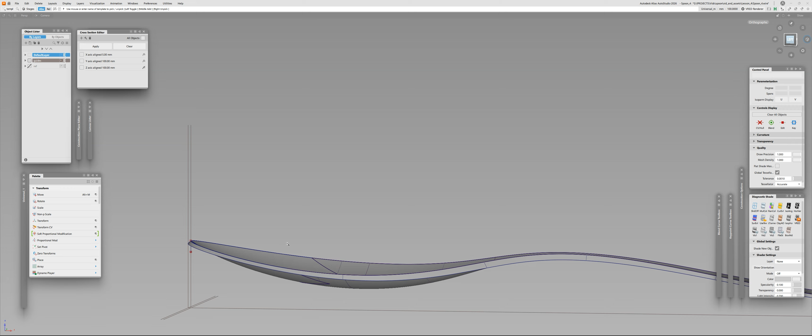Right, so let's go now and build the bottom part of the spoon. First of all, I will delete the template for our original chamfer, we don't need that anymore. Then we need to cut this surface, which is our chamfer, pretty much the same way as we did it for the top part, because as it is continuous on both sides, I won't be able to construct a surface using the skin tool. So I need to separate it.

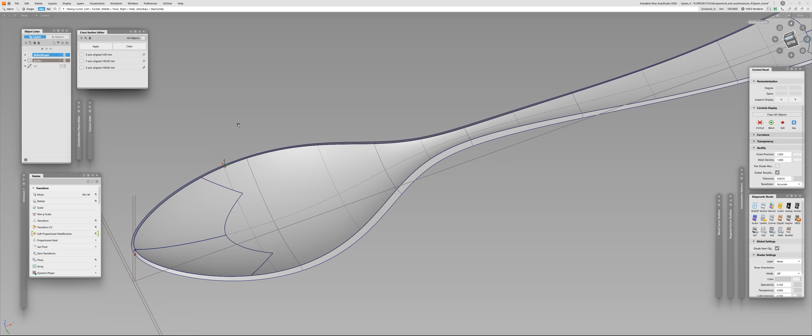As I mentioned in the previous lesson, for the top part we used only a 2-degree curve, so on the V direction we have only 2 degrees, 3 points, and a really limited amount of motion. For the bottom part, I want to bias the handle a little bit so it won't be too arched, eliminating some of the bulge and making it a bit flatter. I'd also like to make this portion of the back of the spoon a little bit wider, and for that I need additional control vertices.

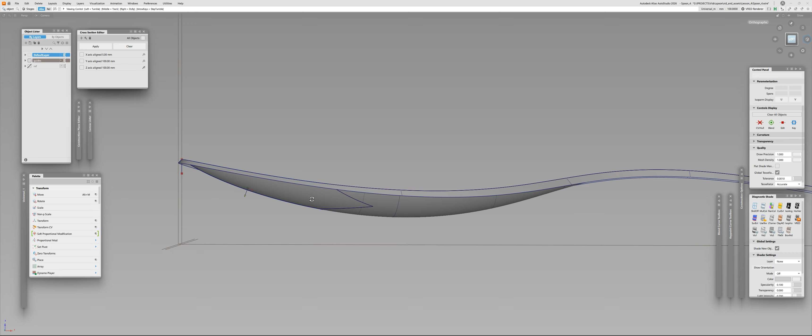The general approach when you need more control is don't bring it in right from the start. Begin with the minimum amount - here I had 2, and I will keep 2 by default, adjust, then bring in others. On top of that, I'll probably do a slightly different cut, because the bottom part has a bigger distance, so the curve will be longer, and I believe this same cut won't be enough to perfectly create the proper balance.

So what I'll do in this situation is insert my curve and surfaces to perform a cut much earlier, probably somewhere here for example. And on the end of the spoon, probably at the same position.

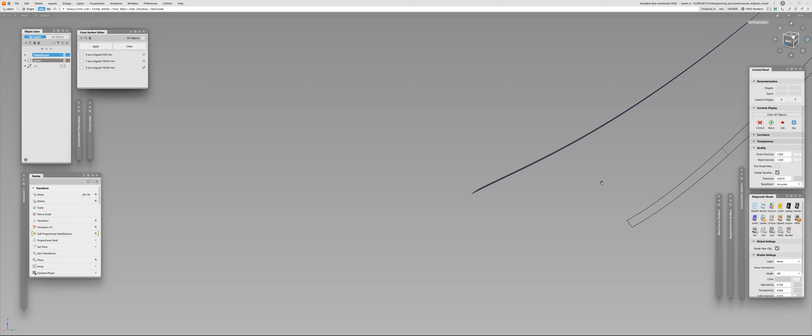So let me delete this, I don't need that. Trim - I'm using the trim command, same as in the previous lessons. Isolate skin, delete the history, and bring in one additional degree.

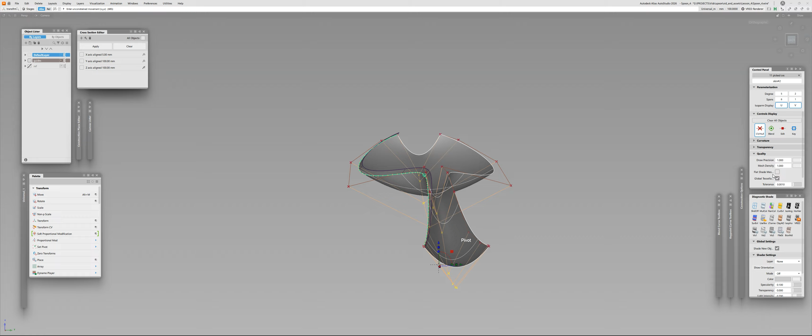So basically there's one hole in the middle. For now we will bring more - delete this part, use pick CV hull, or you can just manually pick all of them, it doesn't matter, and drag them down. It's a little bit slow, that's because of the tessellation tolerance. Let me just make it a little bit faster.

What I'm going to do now is use the patch precision tool. It's in Object Edit - I already used it, but let me just patch. Yeah, it's in Object Edit, here it is. Patch precision, as I explained in the previous lesson, gives you curves and surfaces which follow the UV parameterization of the surface. It will give you a center line, the parametric center of your surface, which is very handy.

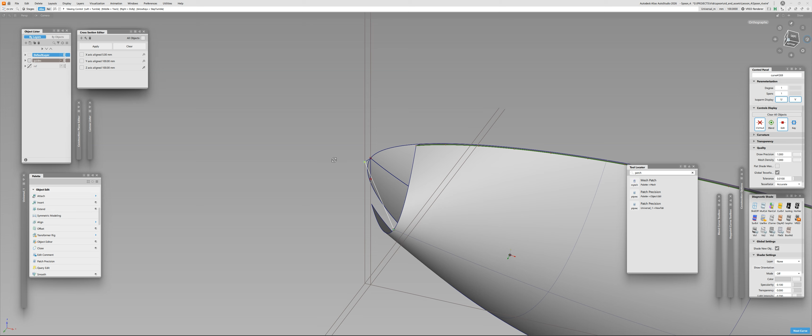Now I will create a line like this - no, not like that, sorry. I will create the line, just a random line like this. I'll bring it to 2 degrees and align it like this without a scale. So that will be my guide.

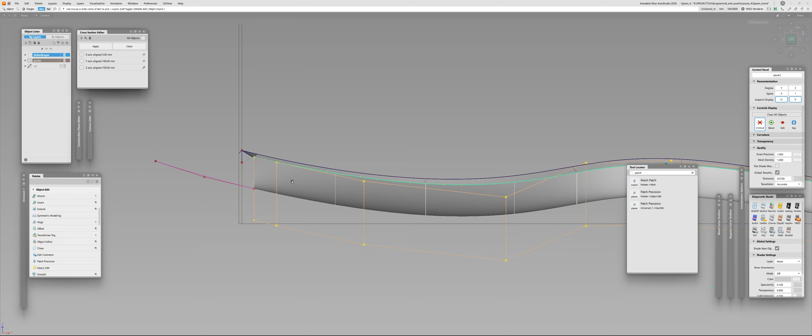By moving the CVs of the surface, I will guide this curve and see where it's pointing. I want it to point somewhere closer to the edge here. This is important because if I don't do that and instead bias it somewhere else, there's a really long travel distance and there will be more than one additional degree - I'll probably have a distorted surface here, with really aggressive distortions that will be difficult to control.

So I'll use this approach and just move CVs and start sculpting. Since I have only one CV here, for now I'm just using the transform tool without the CV transform tool, so just casually moving things around, up and down. This one goes down a little bit, like this, and this one probably - come on, where did you go? Nah, maybe this one is just too close, just like that.

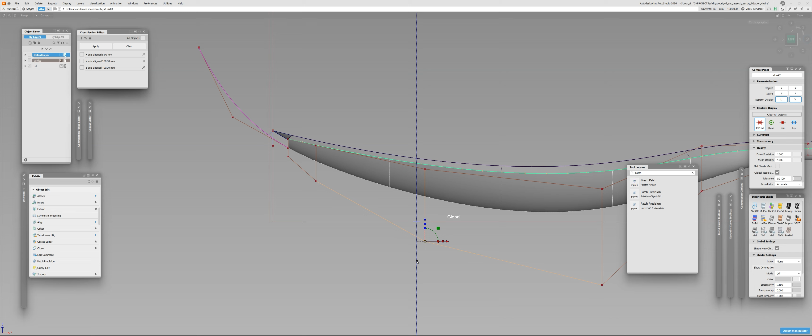All right, so at this point, I will bring CCRV, the curvature tool, to inspect the curvature. And obviously, we're going to see that it doesn't really work for me right now, so I need to adjust it the way that it actually gives me relatively decent results.

Now I'm using the CV transform tool because now I need more precision. Let's put it like this.

Now, right now I'm looking at everything. I'm looking at the curve. I'm looking at just the line here, what kind of a character I have. I'm looking at this part. So I'm just, well, basically sculpting.

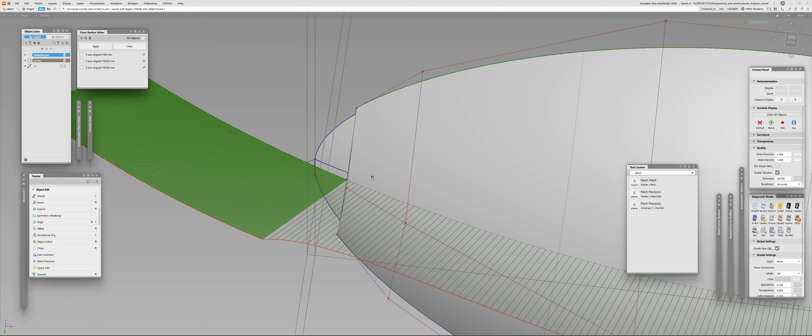Let me see that we are on spot. We do, and that we can proceed.

So as you're gonna see, we have quite a decent, uniform acceleration, and then here at the peak it starts to accelerate rapidly. Now the reason why it does so is because here we have two control vertices pretty close together, and because they're too close, that gives you this additional parasitic torsion, which can lead to kind of issues with our edge.

So our edge, because it is so sharp, it probably will have a lot of tension, but because I drew it that sharp, I can't blame anyone, it just was my design intent, which means that I need to deal with that one way or another. And I will start.

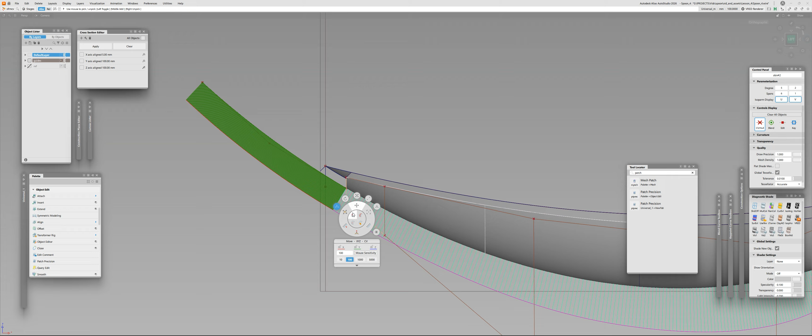I will keep tweaking. So let me just see. Let me just actually rebuild this curve. I'm sorry, so I'll create a new one.

I just need to make it a little bit longer, like this. Just made it too short of a curve. Right, okay, and why 3 degrees? Holy shit, 2 degrees, all right.

And I'm always using the auto scale. It basically calculates the spacing, the tangent, length and curvature length automatically based on the curvature and curvature rate of this current surface, and it does a really good job. In most cases, it does it better than you as a human can do.

So let me put it back down here, maybe a little bit more. Still a little bit more. We still have some wobbling here, and it's probably I just overdid it. So let me do like this.

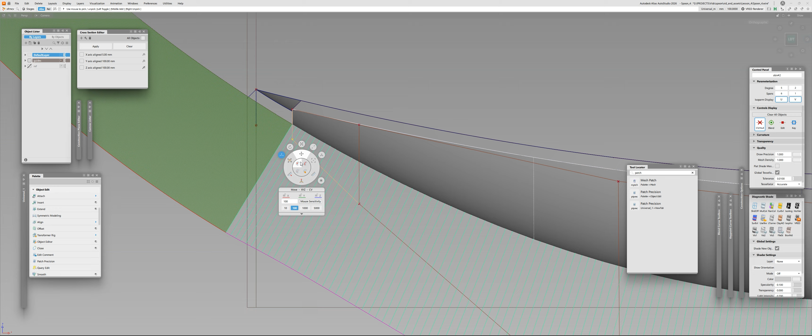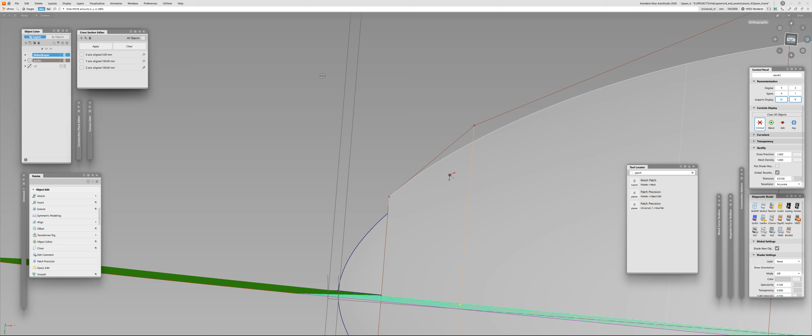All right, so what I see right now is that the curve itself with this edge just doesn't really want to go straight in, which means that just because of sheer size and proportions of the surface, as well as the tight edge here from this portion, it wants to accelerate. And because it wants to accelerate closer to the end, I will basically let it do this acceleration.

The only thing, I will minimize the rate of that, but I don't want to do it like this because it will accelerate, then decelerate, and accelerate again. That will look like an error. And as I don't have any additional degrees on my surface, that will be the most natural portion I can get.

And you're going to see this distance which we have here. So it's relatively close, but that means that when I construct another surface, so another curve, the actual curve will go right somewhere here, it's supposed to absorb this distance. So the further away I place it, the smaller the discrepancy will be.

So what I'm gonna do next is, as this is basically as good as we can get with the current set of control vertices, which I actually like. Maybe actually, wait one second, let me actually make this one a little bit higher up, like this. Let's check.

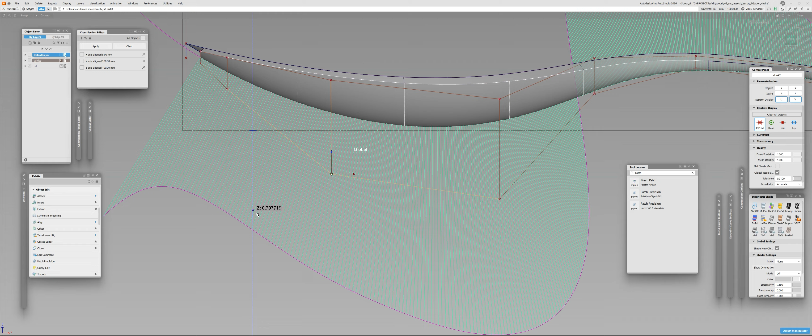And let me actually maybe move that still a little bit like this. Completely forgot to increase the scale. Yeah, right, like this. So actually we have quite an aggressive...

Let me work on that a little bit more. And now it goes a little bit away from that. That's fine, sorry.

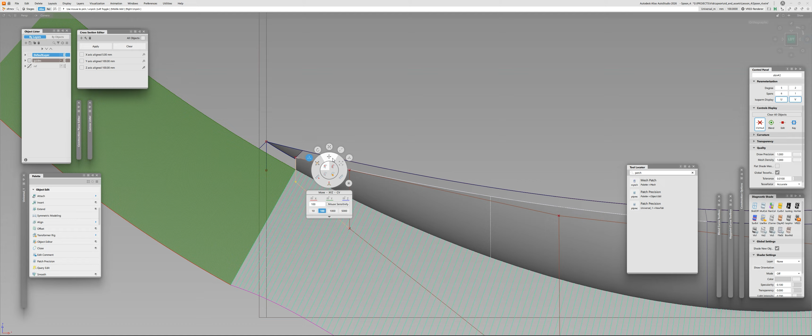Closer. Now, don't look at the fact that we have this kind of, you see this curve, it just aligns to that on the very, very edge. And this is the reason why we are not doing that.

And that's why I said in the beginning that we use all of this part and try to adjust it this way just to get closer to the proper point so it will curve in the proper direction. Probably like this one, so I leave a little bit of acceleration on this point. I will not dive it down.

So something like this. Right, I believe that's closer actually. Okay, I'm fine with that.

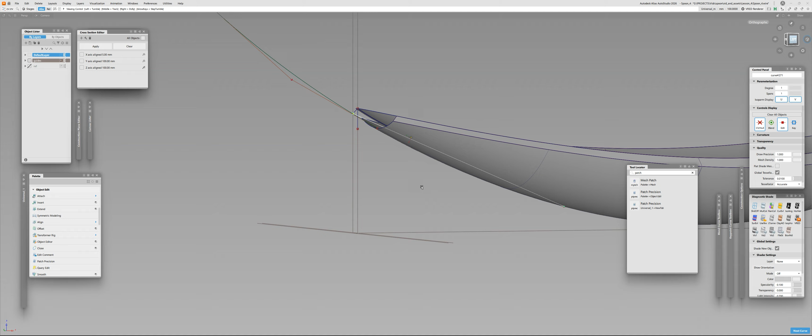Now, I will do another curve. And let me just pick that. And I will do the same, so I will bring... 3 degrees.

Oh, sorry, 3 degrees. And I will align that as a curvature as well, but much further than the original one, because we'll be cutting all of this, we don't care about this position. What we're caring about is... come on.

Come on, pick it. All right. Okay, so now what I'm going to do is I will try to balance the curve so that it forms an accelerated curve.

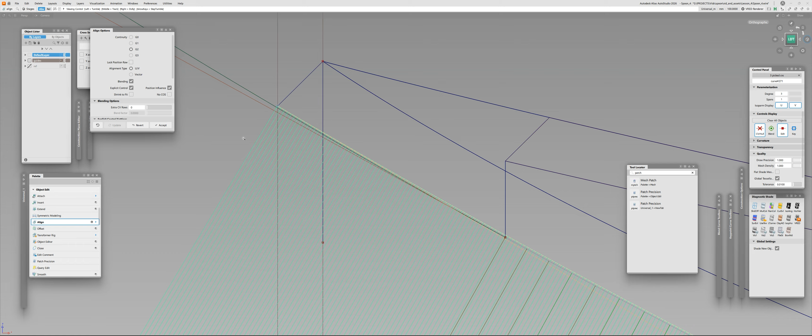You see what's going on right now. So we have this slight deviation here. This is totally fine, but as you can see, the curve goes, and as this one has a much longer and bigger distance, it will absorb the discrepancy between the fact that we have such a tight nose and such a deep, big scoop.

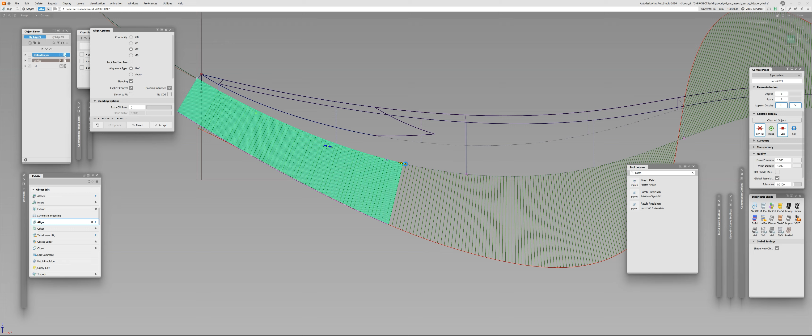Now I really want to have a little bit of acceleration towards the end, so it will accelerate a little bit more, so that the acceleration isn't decreasing at the end, but starts to increase. Maybe somewhere here.

Right, you're going to see how further the cut will be for this. Well, actually not really that far, but it's further than the original one. All right, so from the look of it, it looks all right.

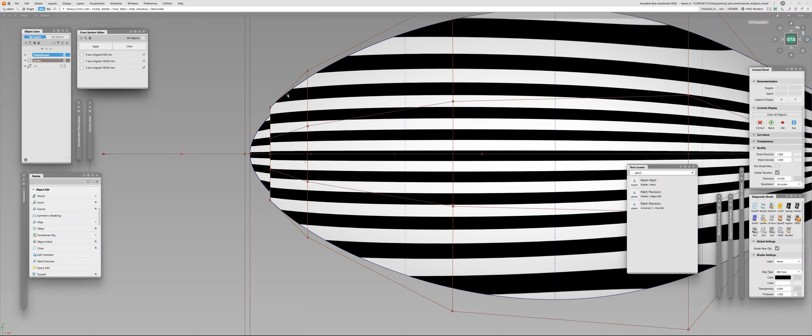Now, before doing anything, I will go in and bring another control vertex as I promised. Now when you look at this from the top, you're going to see that we have this surface structure, and then the curve kind of spreads away. You're going to see this right here from the side. Now somewhere from here, and then it just kind of does this wobbly character.

Now that's because of the fact that when we extend the chamfer, we basically bias the edge, and it takes this and absorbs it into our surface here as well. Now it doesn't mean that this is bad, it's actually quite a decent thing to do, but that means that somewhere here, there's the point where it's supposed to start to bend inwards.

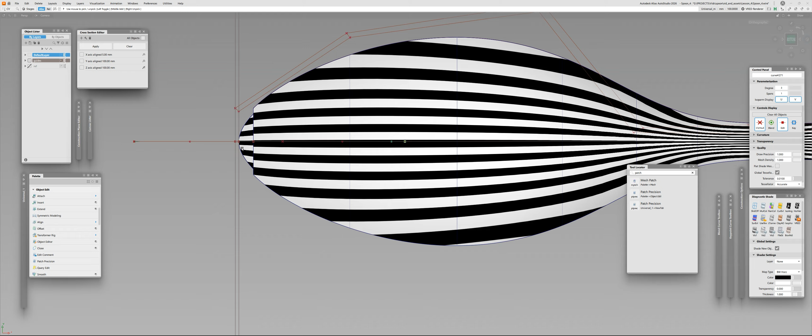So this acceleration, which goes in this direction, right, so the tangent direction will be this one, it's supposed to curve inwards. And that means that here we probably will have somewhat like a little bulge because we have this pointy nose. But once again, this is the nature of the shape and the nature of the design.

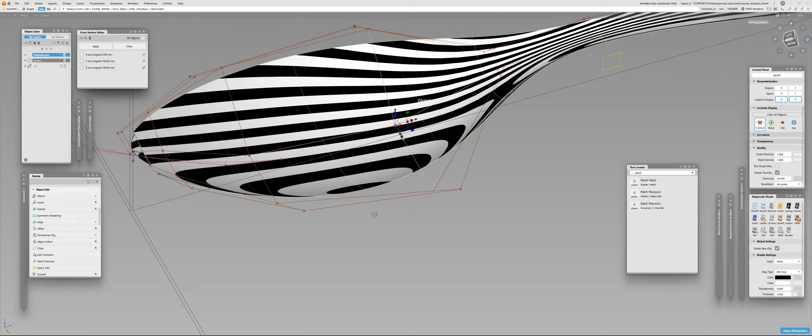Our goal here is to probably make it a little bit thicker on this, so what I'm going to do is use symmetric modeling. I will take one of the CVs and try to extend that away like this. Now the reason why I'm doing that is because I want my bottom part here.

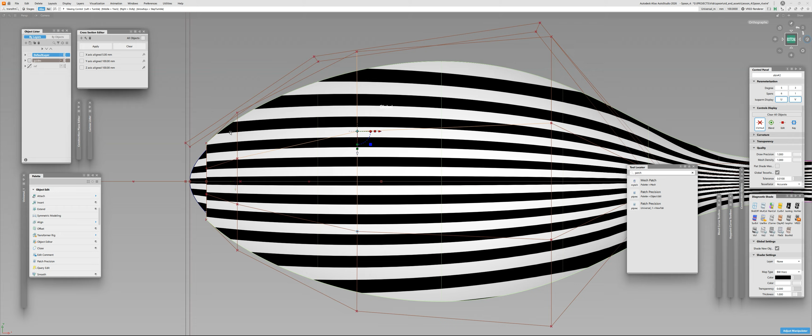You see from this angle how archy it is, so it doesn't have a character at all. So I will make it a little bit wider on this side because I want it to be a little bit different. Same I'll probably do with these ones, so I kind of bend that to make it a little bit flatter on the side. But what's more important, and that's the reason why I actually decided to create more control vertices, because I want to make these ones much wider.

So I will use, probably, take all of them like this, all of them except the last one, and then I will move them like that. Let me check. Yeah, that's much better, because otherwise it would really be like whoop, like this.

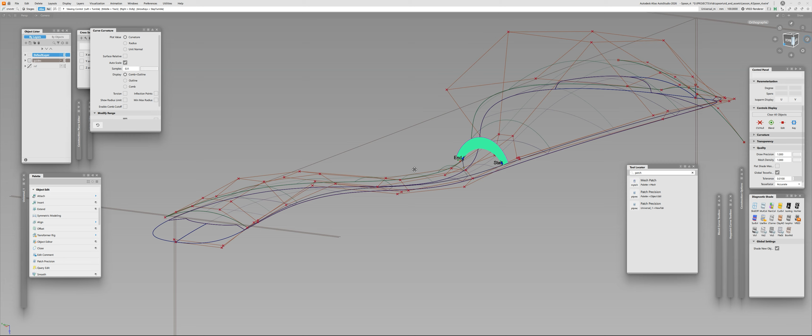All right, let's look from the top. Now this is probably a little bit too aggressive, so probably I will turn that down a notch. All right, this one is fine, this one is fine, this one is a little bit maybe.

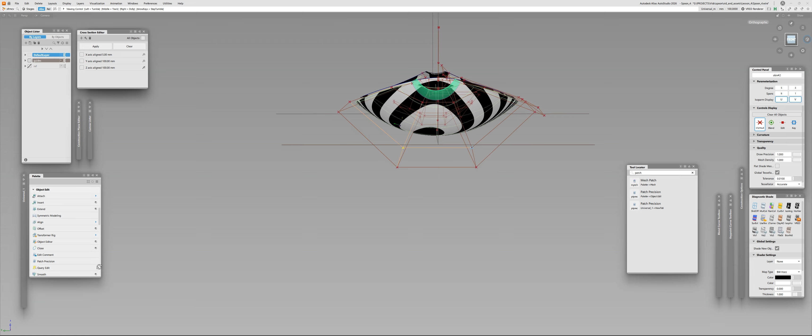I'm looking at the edges right now here. Probably I will keep it as is. Now I don't want it to touch this one right now, although maybe a little bit. Sorry, wrong direction. You know, the wider I made it, the more curvy it will be and the more pointy, so the more aggressive the transition will be.

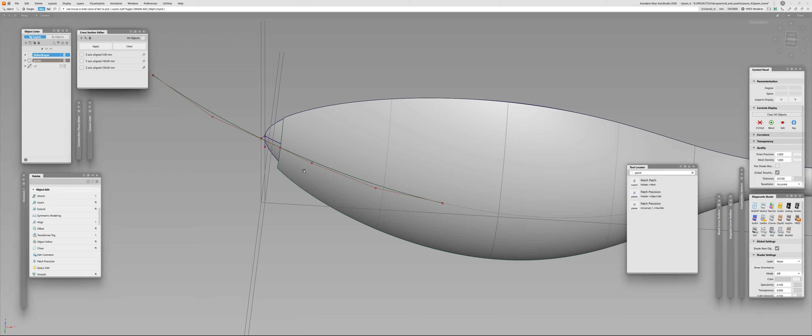So I'll probably keep it like this for now and start building the transitional surface. So let's see what we came up with. I will insert the curve in the surface like that. Let's trim, let me see that it's just definitely on the edge. This is important, and it is not.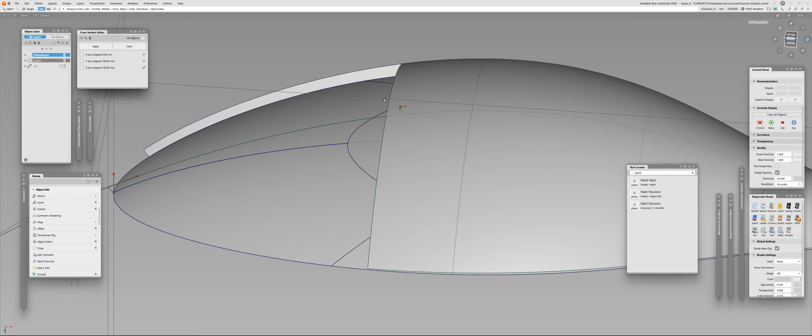Okay, actually no, it is. It is. Now don't look at this discrepancy, that's because of the tolerance of the curves. The curve itself is actually right there, so as you can see, kind of pick it up. So it's a visual imperfection.

So let me insert the current surface. Are we inserting the current surface? Yes, we do. And I will delete this one. I will trim and then duplicate. Okay, so I extracted this edge.

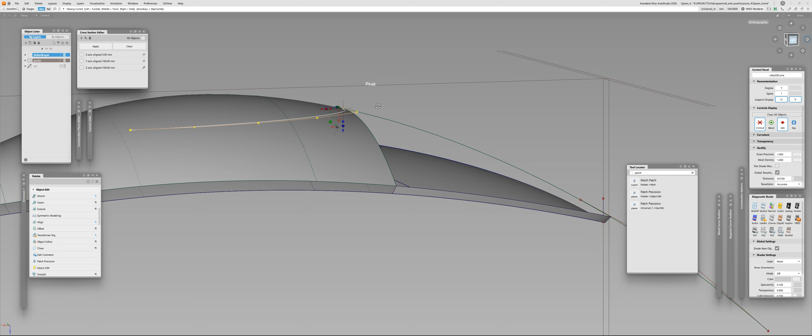Let me set the pivot somewhere here. Scale that like this, and then I will place it somewhere here. Now I probably will not scale that, I believe there is no need, so I will just pick the one point somewhere.

Let me just align that. Let's see, maybe probably somewhere here. So let me bring 3 degrees and let me try to project.

So as with the other parts here, these sections from the top, on the top part, I will project curves, not curves and surfaces. I explained in the previous lesson why I did that.

So now I'll hide this and I will create a square. 1, 2, 3, and 4. All right, let's see how it goes.

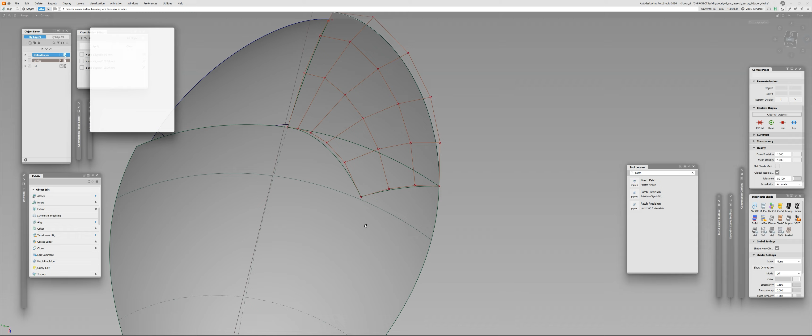So let me project G2. I'm projecting on the Z direction. We are having tangency deviation here right on the edge. I wouldn't say that that's because of the trimming. I would say that's because of these CVs not being collinear. So we'll fix it a little bit later.

Let's look at what will happen when I project this one. Will we have positional deviation here or not? And we have a positional deviation. Well, that means only one thing, we just don't have enough degrees.

So let me increase this to 4, delete curve and surface, and reproject that again, like that. So now we have curvature, tangency error, we don't have positional errors, that's good.

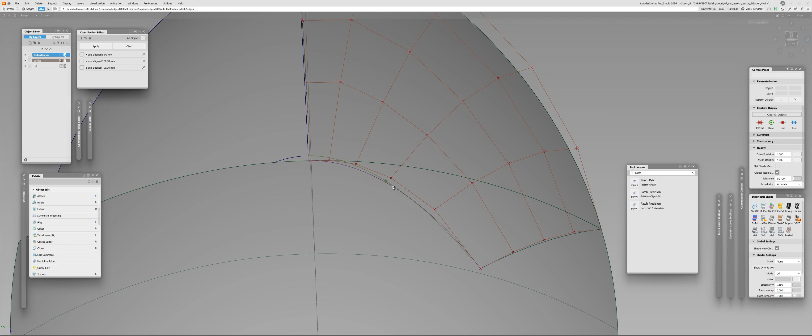Now we will use the symmetry plane align and fix it this way. So now it's supposed to be, oops, sorry. It's supposed to be curvature here, and curvature here.

Now in the previous lesson I explained how the symmetry plane align works. Basically it makes the surface collinear. The first row of CVs is collinear to its counterpart, which is supposed to be symmetrical, which is really handy for these kind of situations.

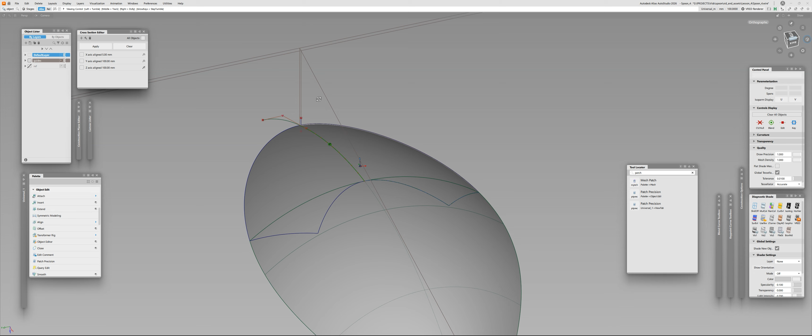Now let me project curves and surfaces here and here. But come on, what are you doing, Alias? Yeah, okay, it's all good. Let's trim, and we have our nose.

Well, right from the get-go, I see that. Yeah, we have this lip here. We have this lip a little bit kind of bulging in a wrong direction, very minimally, but it's there.

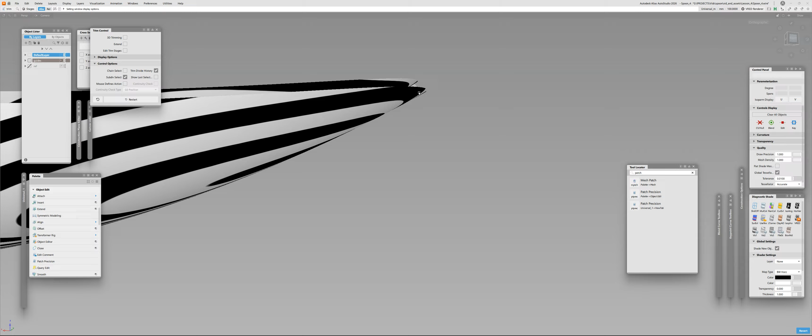So we're gonna see this here from the top. Now it's all good here. It all goes right, and then at the very end, you're gonna see that it just starts to kind of rotate in the other direction. That means it goes, and then it just kind of gets this negative acceleration. Now this is not the end of the world.

This is actually legit. A lot of people will think that this is your design intent. That wasn't my design intent, but it's close to what it is and what I wanted. So that's fine, I will leave it as is.

And remember, when you do your first iteration, basically from the sketch, errors will happen because in a lot of situations, like when I'm making these cuts, I'm guessing where it's supposed to connect. So in a situation like that, what I'm looking at is, okay, when I will be doing a next iteration or an A-class pass, I definitely move the span from this point to somewhere here and shift this one somewhere here.

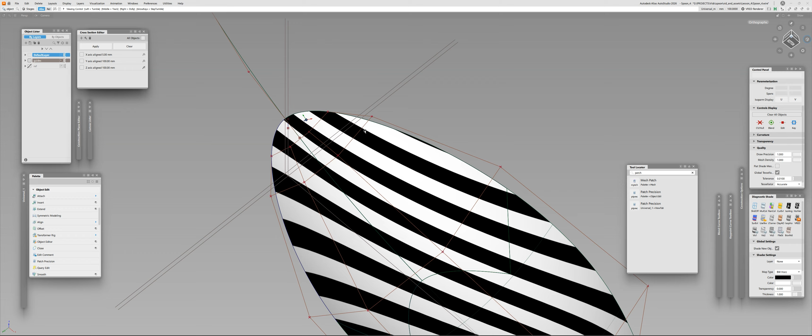So give myself a more breathing room, and then I will probably make this nose just a tidbit wider, and then I will eliminate this in no time. It will go away. But for what I have right now, it's a pretty decent result.

So let's keep going. And I just want to mention that when I did the same spoon for the preview of the video, and we will get back to this spoon in a minute, I spent a little bit more time than I spent on this one.

I really don't want you watching me doing this, 3 hours straight in complete silence. I believe it's not fun, but I hope that you get the understanding of how it's supposed to be done and how I'm doing that.

All right, let's go to the back part. I already tweaked it, so it's less pointy. It's still pointy, but less so, which is good.

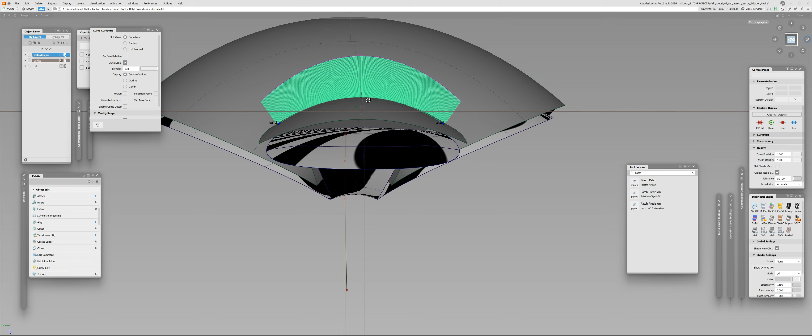And now let me basically do the same as I did with the top part. Where's my chamfer? Oh, here it is. So I'll untrim my chamfer. I will trim this part and do the same thing.

So duplicate, you already know what we will do. So scale that. Wrong position, this one. Set the pivot here, snap. I probably will not scale it also, so I just let it be.

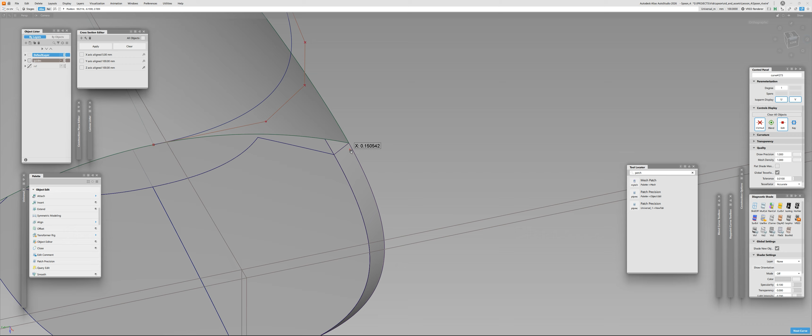Project it somewhere here, maybe here. Yeah, probably. And well, I'm sorry guys, I just completely forgot.

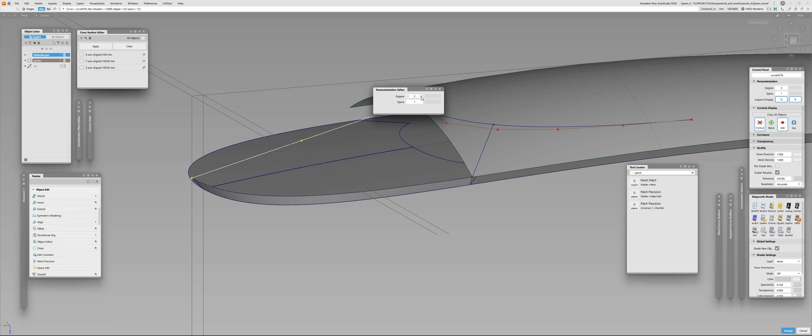I didn't really build, I forgot to build the curve. I thought I did it, but I didn't. So let me build the curve first. Sorry, revert. Now we will save this, don't worry.

So we just need to tweak the positions a little bit because we didn't do that. So here we have the end, and you're gonna see that it kinda doesn't really work right.

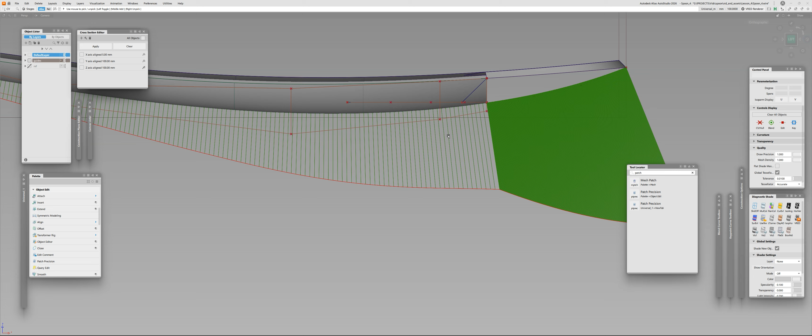Here we have the outer scale G2, that's right. So let's focus on these control vertices. I'll move that, oops. Let me just... Now I really want this to go down. Now, one of the benefits of the spans is that I can do whatever I want with this. I'm not losing any continuity here because it doesn't affect these ones. The control vertices within the span have a limited zone of control because of the basis function by Cox and de Boor, who developed that. And that's intentional.

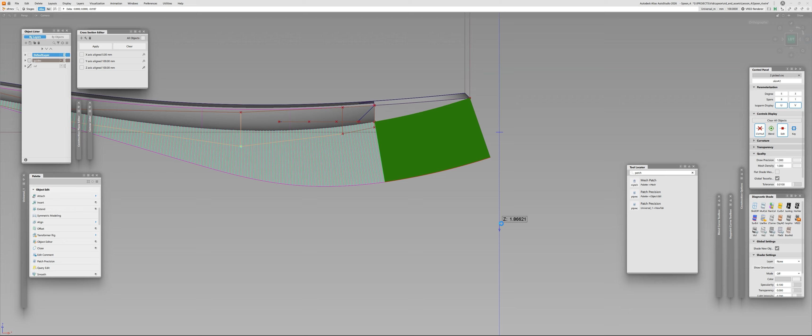So I'm looking at this stuff and I'm thinking, should I really increase the acceleration or just let it peacefully come to an end? And actually, I just can't decide what I'm gonna do with this. I don't remember. I believe on the original spoon I made more of an accelerated punch here. But let's just make it more gradual and uniform. Why not? Probably something like that. Okay, let me reposition this one.

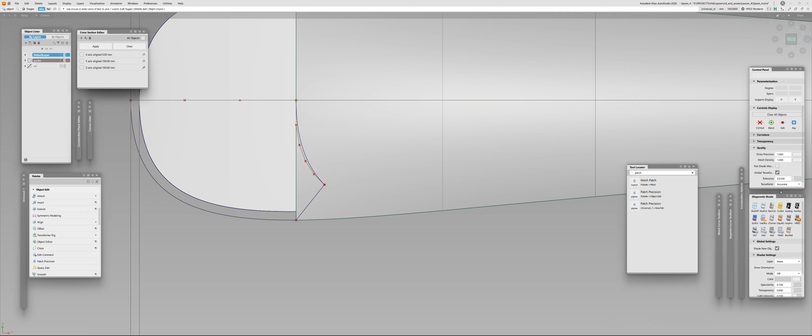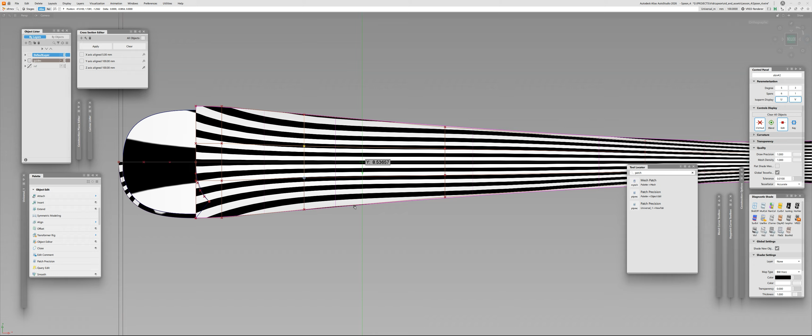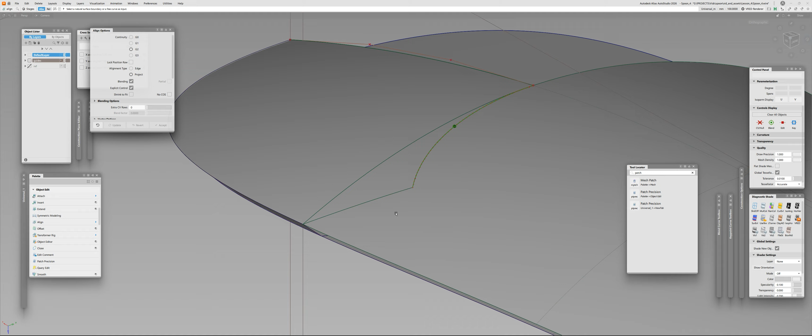So let me just delete this and let me project on Z direction. Let me do this one here. We have a position deviation. Let's increase the amount of degrees. Bam. And then let's project again. Now we have a tangency deviation. That's okay. That's probably the wrong position for the curve. Yes, it does. Now, at this point, when I'm looking at this stuff, I'm like, okay, this is the wrong point. I don't want it to be here.

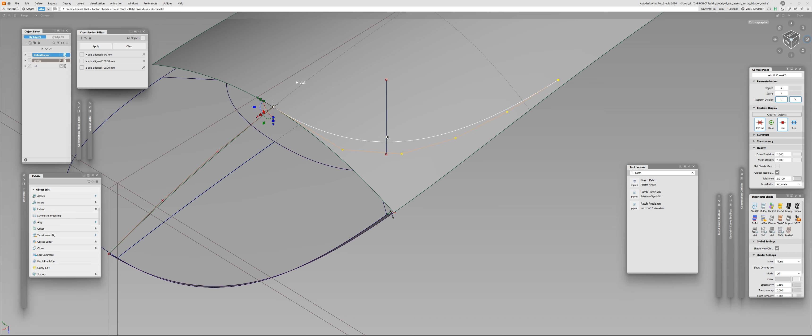And what I'm gonna do is I will just mark it here where it was, and then I will just reconstruct this again, but this time I will reposition this. As I have a gap, it means that there are just not enough control vertices, and that's because it covers pretty significant ground. So what I'm gonna do in this case is shrink it a little bit like this, and then repeat the process, probably somewhere here. The shorter these are, the more chances that I will achieve continuity, but at the same time this part will be cramped and we may have this additional pinching, which we actually don't want.

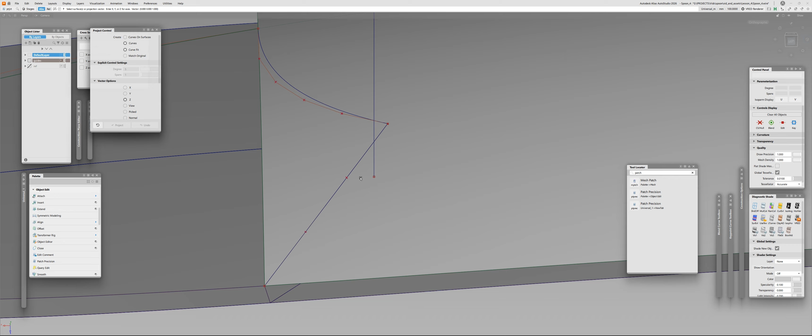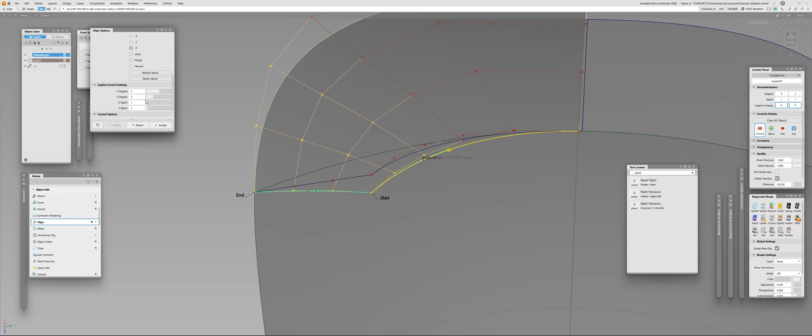So I'm still looking where the original position was, and I'm trying to avoid that, maybe somewhere here. All right, let me trim this, and let's bring 3 degrees, and let's project again. All right, we have a deviation here. That's okay. We will see how it goes. Okay. Now let me delete this, and let's project. Tangent deviation right there. Additional degree. Here we go. Now let me use the symmetry plane align again. Flip it on the other side, and that's it.

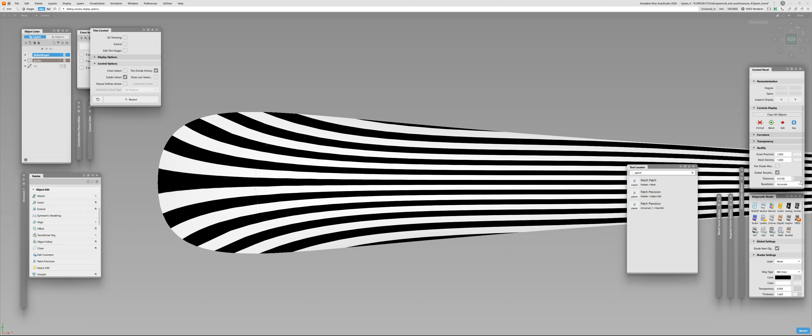So let me now project current surface on the Z direction. What, you're measuring something else, aren't you? Yes. And then we will trim. And let's take a look what we have. No, it's actually quite decent. Now you see these wobbles, but that's actually because of the tolerance of the tessellator. Yeah, that's actually quite decent. So good.

Oops, what do we have here? Yeah, that's probably an issue. Let me see. Wait a second. Oh no, it's not. Oh no, there is. So wait a sec, let me zoom in and see. I didn't check the... that's what it is. All right. So let me tweak it a little bit. I'll delete the history, activate my continuity checks, take this control vertex.

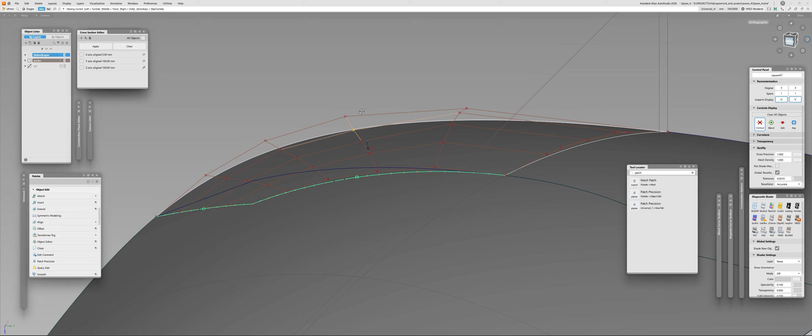Now, because we projected it from the Z direction and not along the normals, the control vertices may not be in the position you really want them to be. So by moving these control vertices up and down, we change the character of the surface, but it doesn't really impact the continuity. Well, to some extent. So let's try. See? Maybe a little bit more. All right, and this one definitely will impact the continuity, but we will try to move it just slightly.

All right, that's better. But probably we need even more, but I believe with this amount of degrees, we will lose continuity. No, we don't. Let's maybe a little bit this one. Oh, yeah. All right, that's better. Check. All good, nice. Oh yeah, that's much better. All right, that's cool. Great.

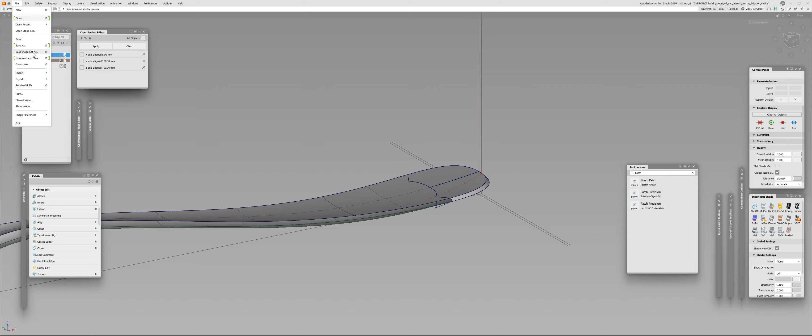So let me increment and save this, and it basically saves it with a 40001, as you can see. So now what I'm gonna do is I will finish the model by adding fillets. Now, just a little bit about the production, because newcomers tend to do fillets everywhere. Now, in reality, for the rendering purposes, this is totally legit.

If you need a good path traced render in Octane or Redshift or Blender Cycles, whatever, pick your poison, then of course it's really important to have the proper geometry there and not fake layer weights or fake normals, which sometimes you actually need to do anyway. And it's good for the renders. But in real life, it's more about the matrix and die, or depends on the type of production.

Like if you have really tiny fillets, they will not help you when you do a matrix, because they won't help you pour the model out of the matrix, even if you have the proper draft angles. And the actual sheer size means that you need extreme machine precision. And when it comes to mass production, that's rarely the case, because it's stamping, pressure casting, depends, and it's not really as accurate as an EDM machine.

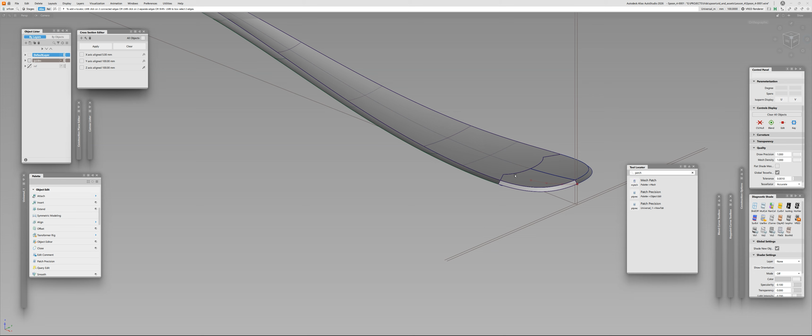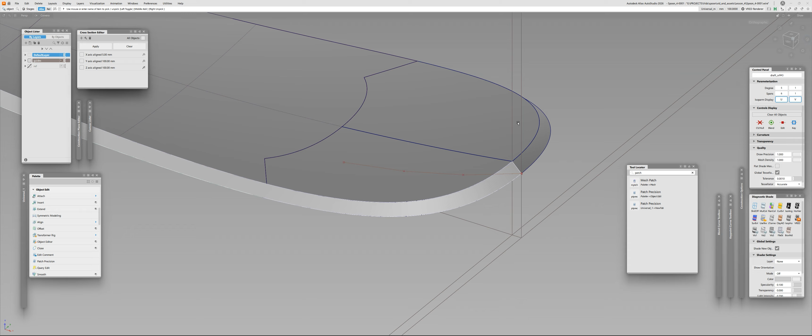But once again, I said that we will do the fillets for rendering purposes, and that's why there will probably be two models, one for production, one for visualization, and we will do the version for visualization. So let me untrim this and delete all the curves and surfaces. So these ones out, these ones out, and then we will flip on the other side like that.

And a good rule of thumb about fillets is, if this is a symmetrical model, do one part and then do another part. Because I'm going to cut it in half, but it takes quite a lot of effort, because when you do fillets, you most likely use the Bezier surfaces checkbox. That means that instead of a multi-span surface, it will be single span chunks, and that gives you a more convenient, more accurate result. Faster, but it's a nightmare to project everything on the other side. You need to literally manually pick every edge and project, which is a pain.

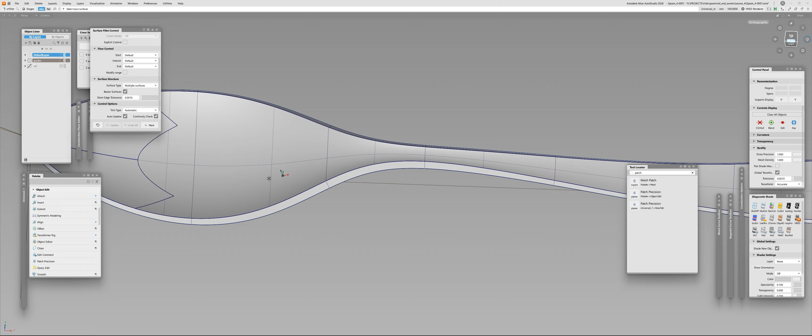So just to save ourselves some time, I will try to do it as a whole, and I believe I will succeed, because these are pretty decent surfaces. They are pretty simple, they are positional, and they have proper angles everywhere, so it's supposed to work. But in reality, you rarely do it as a whole. The start and the end, I will probably leave default, because here the edge is tangential here and tangential here. So it's supposed to work just fine.

I will use the radius construction type. Now there is a difference between the radius and the chord length. It's just the way they construct it. The radius stays the same based on the angle of the surfaces you create the fillet from, but visually it will look like your fillet becomes smaller and bigger. And the chord length alternatively makes it visually the same width, but in reality it will have different radii.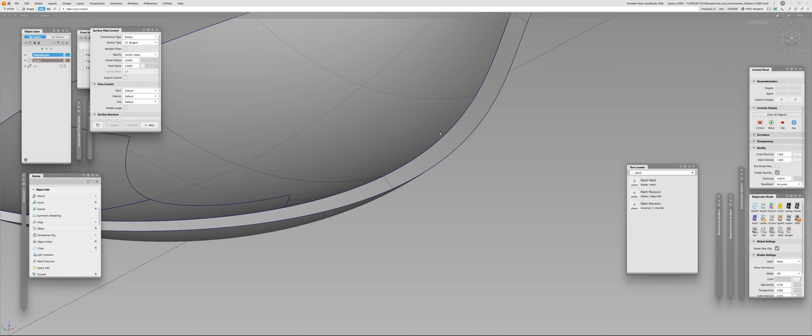Well, I will use just the standard one, and I will probably do the top and the bottom different. It's a common practice to bring a little more interest to the model, although here it probably doesn't matter. So I will use, let's say, 0.2. The form factor 0.5 tangent means it will have a little more acceleration than just a regular radial fillet. And I will pick all these parts, and then these and these at the same time, and hit spacebar and pray that it will work.

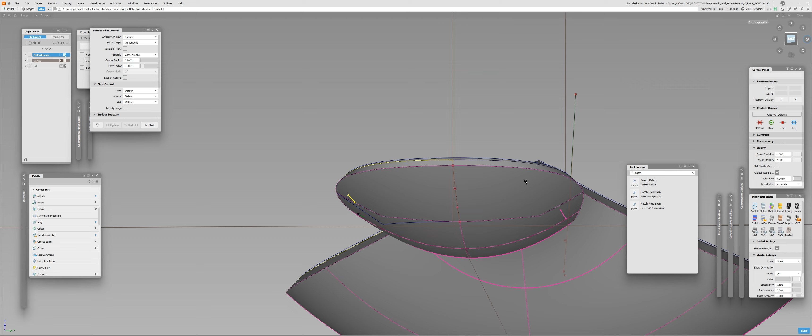And it does. Yeah. So first of all, we check tangency here. It works. And on this part, it does. Cool. Now let's do the bottom, and we basically do the same. I will use the radius type fillet. Select everything here. First one, second one, and I will type it. As I said, let's make it smaller. Let's say 0.1.

And here we go. All right. And that's it. So if you get that far with me, well, congratulations. I hope you learned something from these lessons.

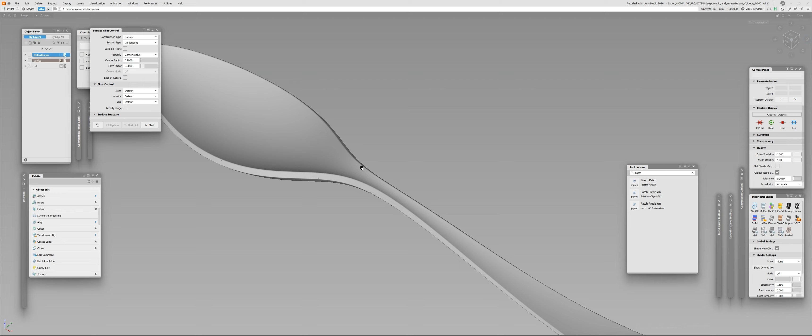Now, it's kind of the end for the modeling of the spoon, but this is not the end of this particular lesson, because if you watch my first lesson in this series, or you just paid attention to the preview of these lessons on YouTube, you will notice that this spoon is missing one crucial component. And I mentioned that I will get back to that at the end of the whole series, and here we are at the end. So it's missing a pattern on a handle.

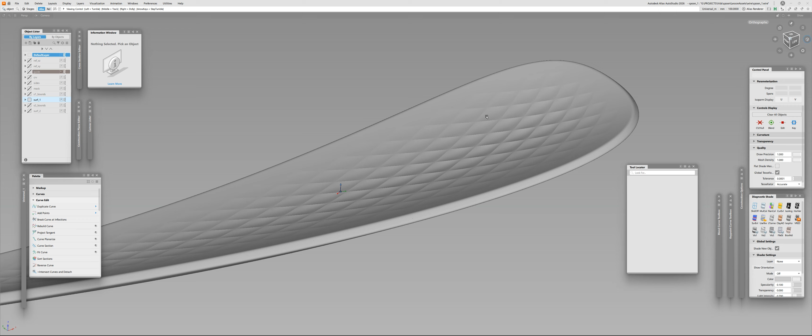And let me open up my spoon which I made for this lesson. Here it is. And you're gonna notice that it has this pattern. Now, it doesn't have fillets here. I do fillets by sculpting, and this is a pretty common tactic when you need to have just a lot of T edges and star edges and stuff like that. But the actual pattern is obviously not manual. It was designed in a parametric modeling tool, basically programmed. It is a script which works with a geometry. It creates the proper geometry, and then I bring it into Alias.

So the reason why it's not in the Alias modeling lesson is because it's not modeling in Alias. I did it outside of Alias. And as I promised, I will quickly explain how I did that. You will quickly understand why it's not a full description, because there is a lot of stuff going on. But I just want to give you the general sense of what it is.

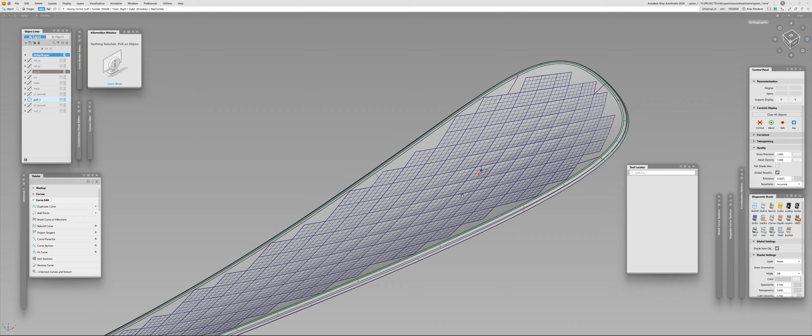And for all the other people, let's just jump into Rhinoceros and Grasshopper. So here we are. The general premise with parametric designs, where you need a lot of repetition or a specific mathematical relationship between the shapes, is you do your classical modeling approach, like in Alias, Fusion 360, Rhinoceros, whatever, and then you bring some parts of this model which you want to enhance into a parametric modeling system.

Now, the most prominent one, which you're probably familiar with me using, because I did it a few times on this channel, is Grasshopper. Grasshopper is a parametric modeling tool which latches on. It doesn't have its own viewport, so it latches onto a couple different softwares. One of them is Rhino, and a lot of people use it with Rhino, because Rhino for a few years already has Grasshopper built in. You see this icon, and it's basically already within Rhinoceros, which is amazing.

And Grasshopper is a standard these days in industrial design and architecture, because Grasshopper can work not only with CAD data, but with polygons as well. So yeah, it's pretty powerful. It has a really logical structure. The data management here is amazing, and if you know the basics of programming, you'll be right at home. It's a very easy and really powerful instrument.

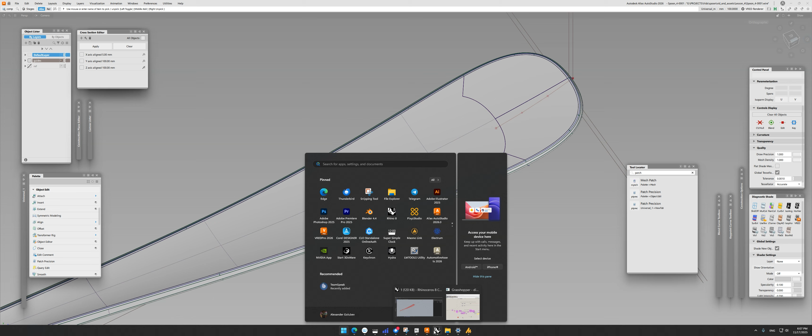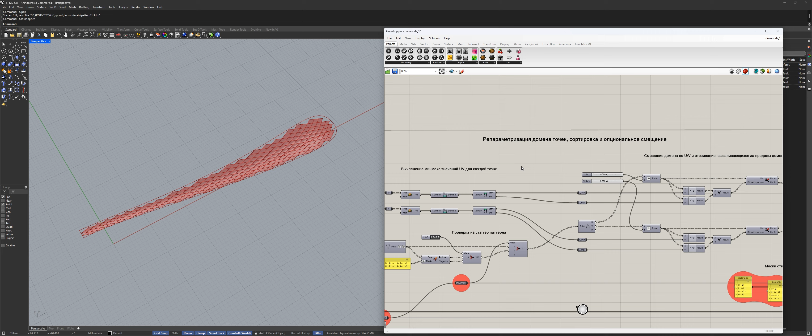Now, the reason why I'm not really explaining how all of this works in detail is because there is quite a lot of stuff. And in all of this design, you're going to see my Cyrillic, I'm Russian, so these are my descriptions of what the hell is going on here for myself, because sometimes you're not doing it for months and then you get back to your script and like, what the hell is this?

So it keeps going, and keeps going. It's not ended, and yeah, this is the final end. This is the edge, and the curves themselves are probably here. Here they are, these are the curves now. The surfaces are here. All right, so as you can see, this is quite a big script.

Now the bottom one is for hexagons, this is for diamonds, but the general premise is as follows. I create a collection of points on one big surface which hugs everything else, populated with points in the hexagon pattern or the diamond pattern. And then I will project every point in the proper direction onto the surface where it is.

Now the main problem with patterns which go through multiple surfaces is that every single surface has its own localized parameterization, and you can't really just do it automatically across the board. You need some kind of mediator, something in between, to make it work. And that's what I did.

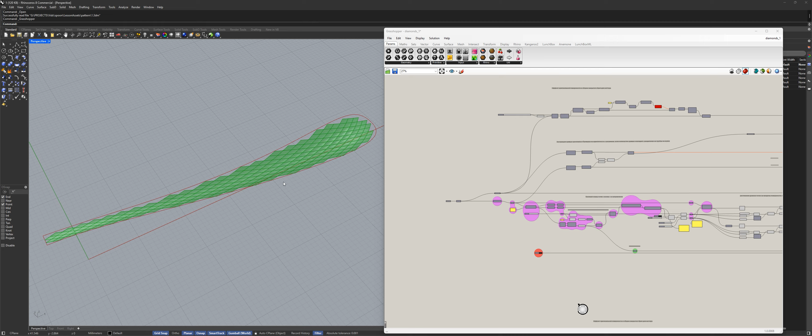So there is a big cushion with the points spread properly, then all of that shoots down in the proper direction onto the actual surface, and when it lands, I collect it. It gives me the same points with all the necessary data: the vector directions, the curvature values, the actual position in 3D space, and UV coordinates, everything I need.

And then through these points I will construct the lines, and then I will use the rail tool or a sweep tool. We actually have them in Grasshopper, and construct the surfaces. And then I will add additional attractors, to make the size of the protrusion bigger or smaller based on the proximity of other stuff, and so on and so forth.

And the reason why this script is so big is because it does a lot of things behind the scenes, and it can do a lot of different patterns, not only diamonds, and it can do conics, if the surface is a conic surface, and it can understand closed geometry. It understands if your object has holes and you don't want the pattern there, or you want to use that as an attractor, and a lot of other stuff. So this is more like a combiner for me. And I have plenty of these things for my own use.

If you try to get into parametric modeling, it's really fun. It's really cool. It's not as complicated as it may seem, but there is no ready solution on the internet or in the plugins that can do what you really need. In most cases, you need this holy grail, an ability to construct patterns across multiple surfaces, and that is like a test for proficiency. Every single designer will grind it down until he figures out how to do it.

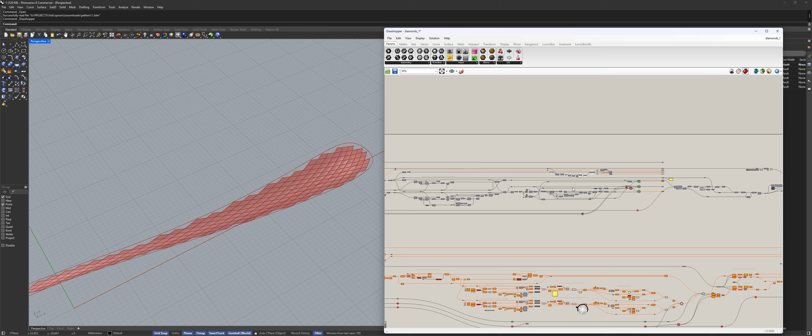Now, the question to you: are you really interested in this or not? If you are, then I can run a new series about parametric design, start fresh, with the general goal to explain how to create patterns across multiple surfaces, any pattern you want. And it just takes some time. It's kind of a slow process. You need to learn data management first.